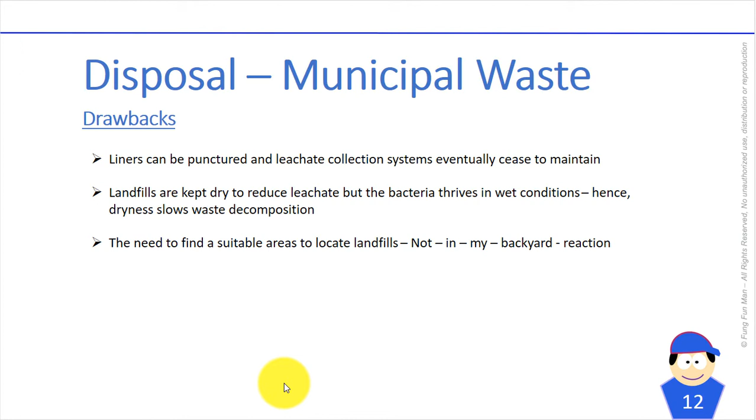So dryness is very important, and it's important to slow down the waste decomposition. In fact, the low oxygen conditions of most landfills will insulate it, so researchers examining landfills often find some of their contents perfectly preserved, even after years or decades. Free preservative. Now in Singapore, it might be troubling because we had an issue some years ago, the not-in-my-backyard reaction.

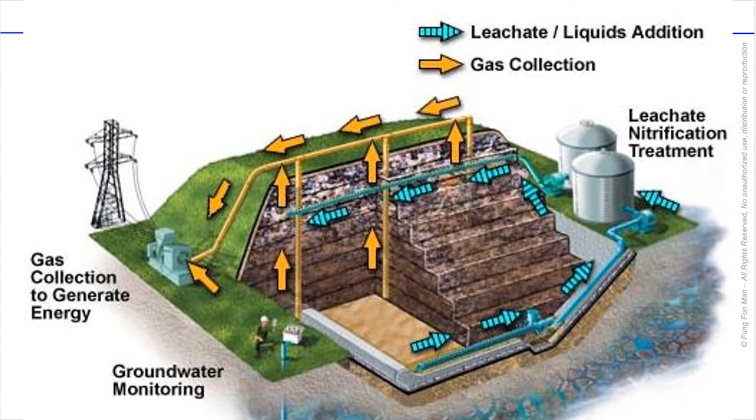So we talk about incineration since we're very young. What is it actually about? It is the combustion, a controlled combustion in which the garbage is burned at very high temperature, so you burn off everything. And in the incineration facilities, waste is generally sorted first and has the metals removed.

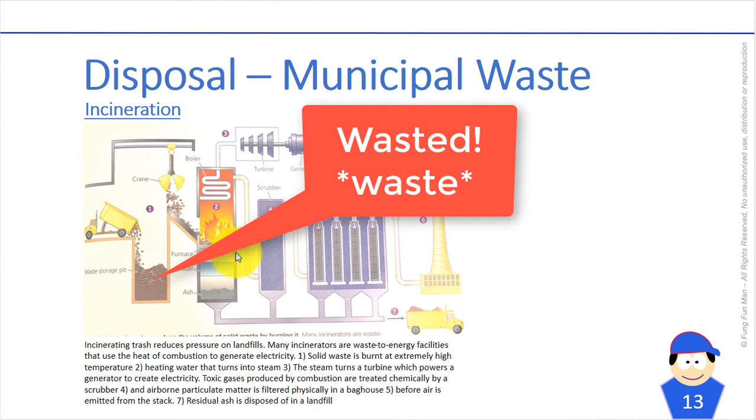You might want to know why. This is chemistry. If you have metals inside and you have a big fire, what are you going to have here? A major firework inside. Not good. No one can see the firework and light, totally wasted. Now the metal-free waste is then chopped into small pieces to aid in the combustion, and then they're all burned in a furnace.

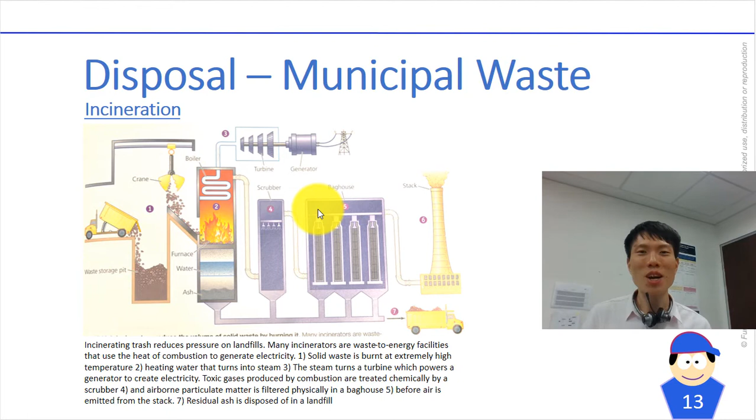Now, incinerating the waste reduces its weight by up to 75% and the volume by up to 90%. So when you burn everything, you lower the volume and do not give so much pressure on the landfill. Now where did the 90% volume go to? You bet, it becomes gases, right? CO2, CO, NOx. They are all the elements that become gaseous state.

Now, the trash that remains after being incinerated contains some toxic components, and therefore must be disposed of in hazardous waste landfill. Just like our chemicals in the lab, we have those chlorinated and non-chlorinated solvents, bottles, right? Separate them. So here we have the hazardous waste separated.

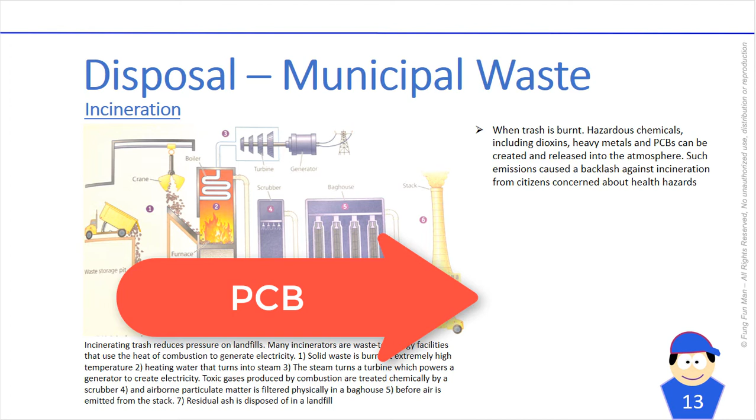And when the trash is being burned, these hazardous chemicals, including dioxins, heavy metals, and polychlorinated biphenyls, which we call PCB in short, can be created and then released to the atmosphere. So these emissions cause a backlash against incineration.

Now the citizens, people who stay nearby, are concerned about the health hazard because of waste, harmful gases, and if they are staying in the vicinity of the incineration plant, they might feel that they are going to be poisoned. So in most developed countries now, they regulate incinerator emissions, and some have even banned incineration plants outright. So engineers have also developed technology to mitigate these emissions.

Now scrubbers are chemically used to treat gases produced in combustion, to remove the hazardous components and to neutralize the acidic gases, such as SO2, SO3, and HCl, and we turn them into water and a salt. Chemical reaction, acid-base, you get salt and water.

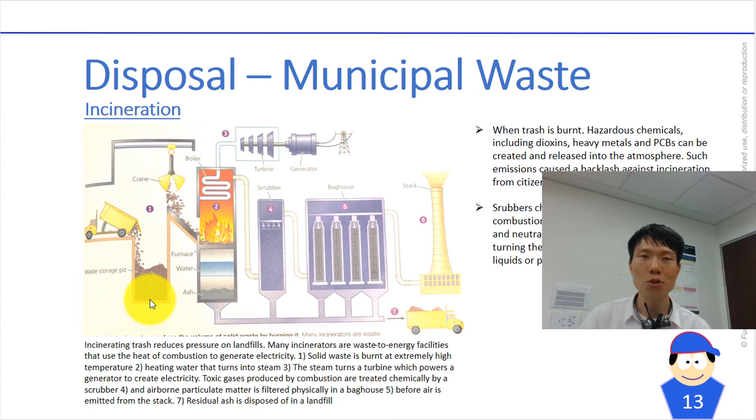So what kind of base do we use in the incineration plant? Dry lime, calcium oxide, CaO - metal oxides are basic in nature, except some of them are amphoteric. They react with these to form salts. So a common salt you can form could be calcium chloride. If not, you could have some calcium sulfite or calcium sulfate - gypsum. Particulate matter, we call them fly ash.

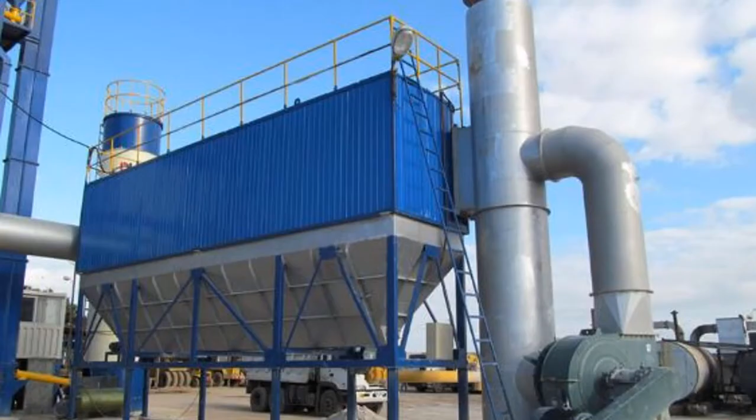They often contain some of the worst dioxin and heavy metal pollutants in the incineration emission. And to physically remove these tiny particles, the facilities may use a huge system of filters, known as a baghouse. So in addition, burning garbage at a very high temperature can destroy certain pollutants, such as PCB - they won't survive at a very high Kelvin. But you have to think about it.

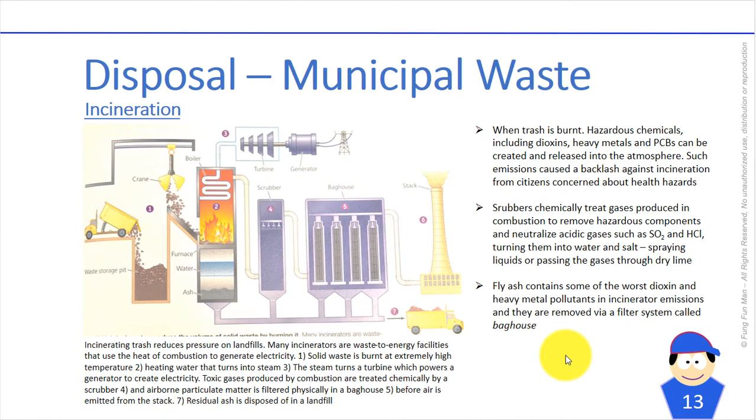Now, even with these measures in place, not all the toxic emissions are eliminated. Now, incineration was initially practiced simply to reduce the volume of waste, but today it serves to generate electricity as well. We know from young that incinerators are now waste-to-energy, or in short WTE facilities. So they use the heat harnessed from the combustion - you know, combustion is always very exothermic.

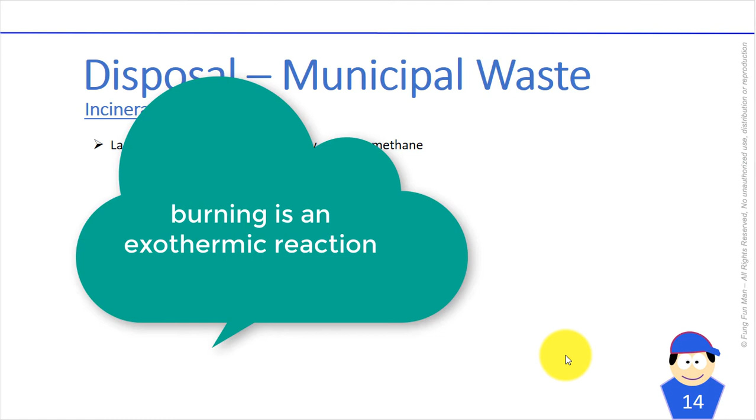In fact, when you burn anything, it's always exothermic. Delta H is negative, and this heat we don't want to waste, so we trap it and use it to boil water, creating steam that drives electricity generation, turning the turbines, and that can fuel the heating system.

When we burn them, the waste generates about 35% of the energy generated by burning coal. That's not too bad, because they are from waste.

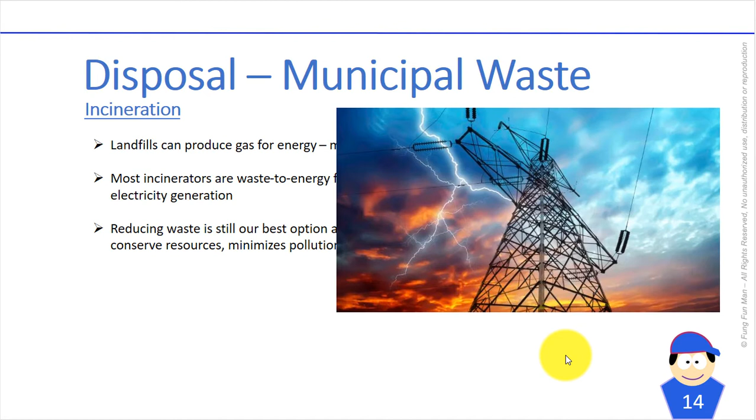And you might think, oh, so the power stations generate energy, they can even make money. Now, that's not true. The revenues from these power stations are actually not enough to offset the considerable financial cost of building and running an incinerator.

Because we need very robust facilities, the infrastructure can't be weak. If not, at a high temperature, they will crumble. We will build incinerators for many years, not just a 5-year plan, it could be a 20-year plan. So we have to have inner linings of the furnace with refractory materials such as magnesium oxide and aluminum oxide.

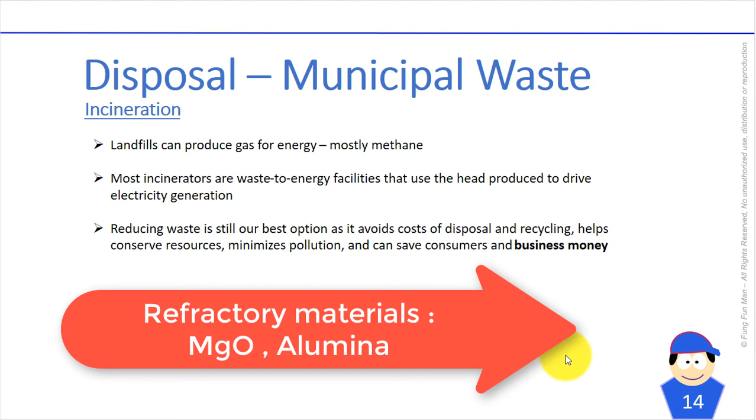And now, because it takes so many years for a WTE factory to become profitable, many companies that build and operate these facilities require communities constructing them to guarantee a minimum amount of garbage to burn. If not, it's not profitable. You build a high capacity incineration plant and then you only get so little trash, then what's the point?

You're wasting your resources. So there are some occasions where long-term commitments by the company have interfered with the community's subsequent effort to reduce their waste through recycling and some reductions. Because companies, the number one thing on their mind is economics, the money. They don't want to lose money.

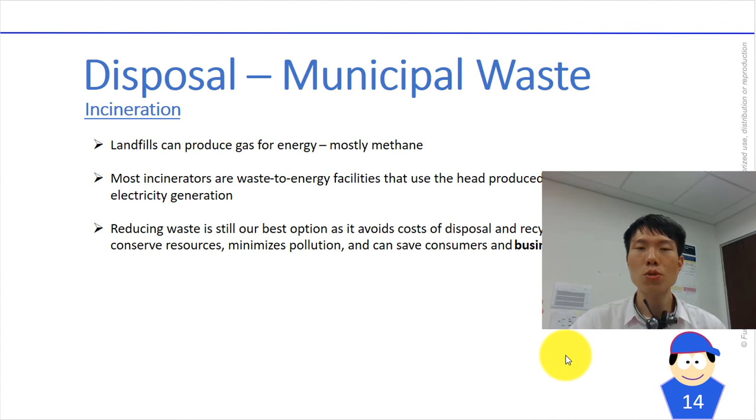So when they operate an incineration plant, they must generate revenue by having waste come in. So if they're underutilizing the capacity, what do they do? They will not want to encourage recycling because that will cut their profits.

So combustion in these waste-to-energy plants is not the only way to gain energy from waste. Deep inside the landfills, bacteria decompose the waste in an anaerobic condition, producing landfill gases, which is a mixture of gases. About half of them is actually methane. Methane is cooking gas, natural gas. We use it for heating purposes.

Reducing the amount of materials entering the waste stream avoids the cost of disposal and recycling, and that helps conserve resources, minimize pollution, and can save consumers and businesses money.

So if you recall last time, one of the ways that we can prevent waste generation is called what? Source reduction. At the point source, we cut it. And one means of this source reduction is to lessen the materials used to package food and goods.

Now, packaging preserves freshness, makes it look good, makes it more sellable, prevents breakage, protects against tampering, provides information. Yet so much of this packaging is extraneous, is exterior.

Consumers can give manufacturers incentive to reduce the packaging, choosing minimally packaged goods, buying unwrapped fruits and vegetables maybe from a market, and buying food in bulk. Because when you have bulk, you don't have to have so many individual packagings. Like in some countries, they package it so nicely.

And the manufacturers can also switch to packaging that is more recyclable. So there are already many items from aluminum cans, soft drink bottles to PCs. We are trying to reduce the amount of packaging there.

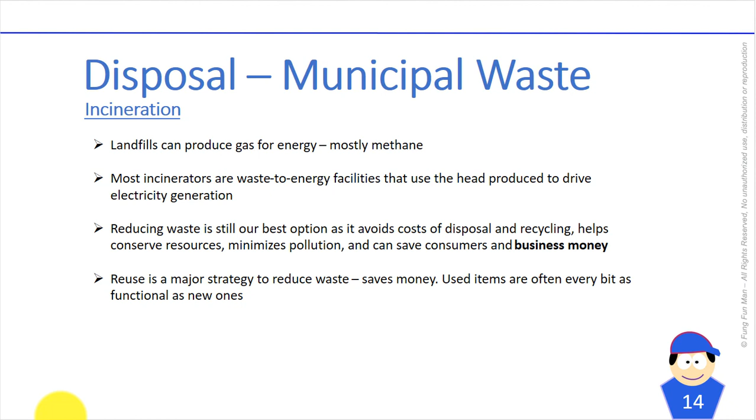So recycling offers many benefits. That involves the collection of used items and breaking them down so that their materials can be reprocessed to manufacture new items. Recycling would divert 65 million tons of materials away from incinerators and landfills in the US, that was in 2010.